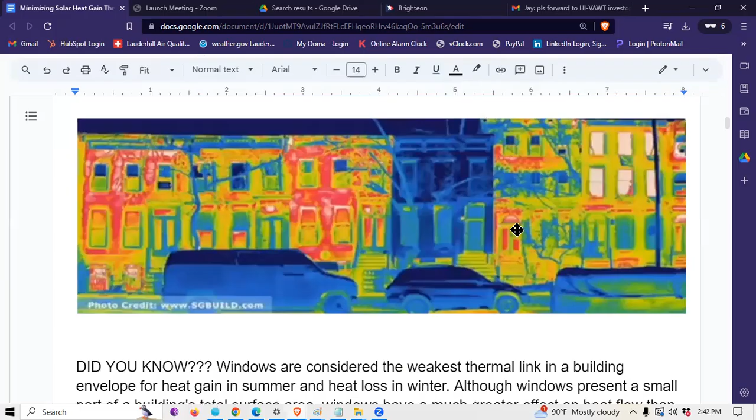As I mentioned, windows are the weakest thermal link in a building envelope, which is what comprises the walls, floor, ceiling, and anything exposed to the exterior. Windows are the weakest thermal link for heat gain in summer and heat loss in winter. Although windows present a small part of a building's surface area, they have a much greater effect on heat flow than walls, ceilings, or floors.

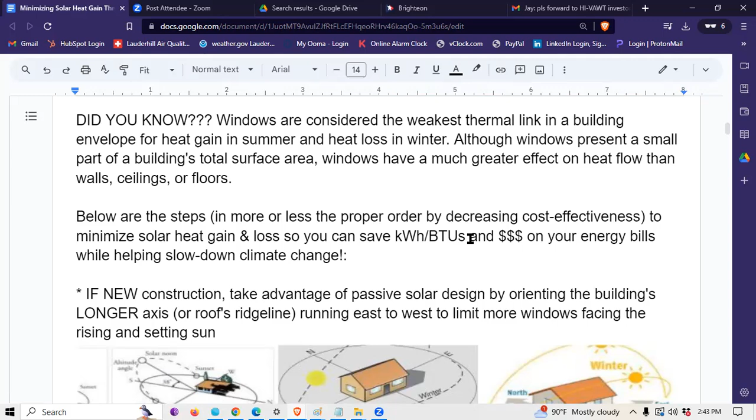Now, the steps below are, in my opinion, in more or less decreasing cost effectiveness. So the earlier ones will have a shorter payback and a higher return on investment, and the later ones will have a lower return on investment, a slower payback. This will help you save kilowatt hours or British thermal units for those using heating fuel, and save money on your energy bills, while also helping us slow down climate change.

Now, this is for new construction only, of course, because you can't just take your building and reorient it. So if you're able to, at the design stages before you've broken ground, you want to take full advantage of passive solar design by orienting the building's longer axis, or the roof's ridge line, running east to west, meaning left to right.

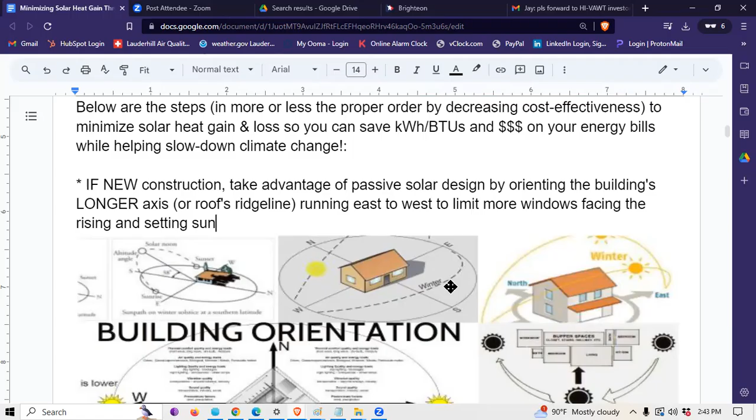Now, this is applicable to both the northern and southern hemispheres. Orienting the building this way will limit the number of windows facing the rising and setting sun, meaning less solar heat gain coming in through the windows at sunrise and sunset. That's why you want to orient the building's longer axis running east and west, so you have fewer windows facing the rising or setting sun.

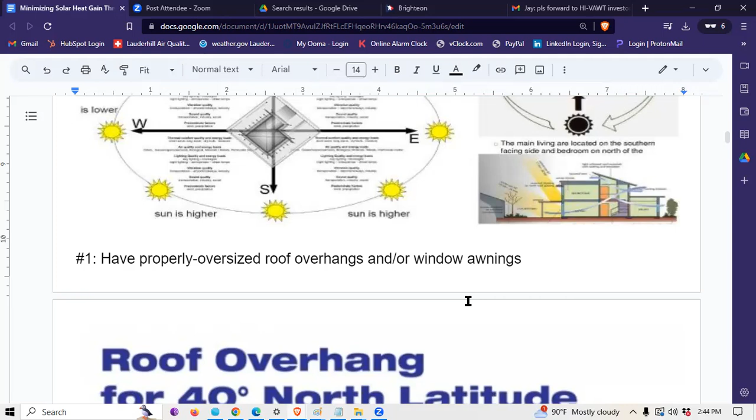Now if it's not new construction, for all existing buildings and retrofits, the very first thing you absolutely must do—it's so low-tech, not sexy—is to have properly oversized roof overhangs over any windows, especially the southern-facing ones if you're in the northern hemisphere.

And definitely block off the east and west facing windows. So as you can see, this is a window facing south. The sun is at a different angle depending on whether it's summer or winter months throughout the year. So you've got higher summer sun, so you can have a shorter overhang. It'll cut it off, not having any sun go in directly through the windows.

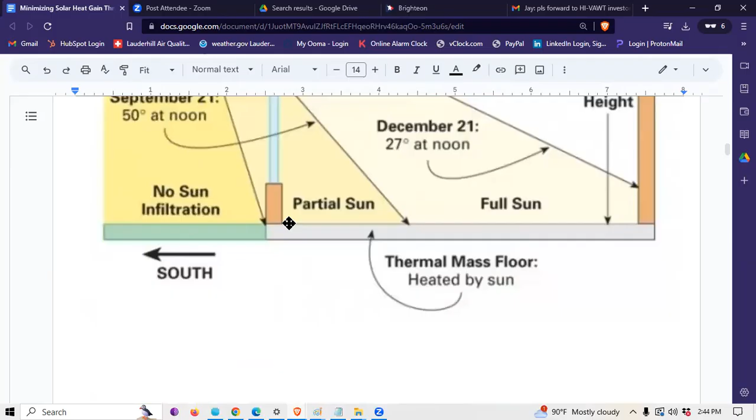So you see how this cheap little solution, an overhang or an awning, could make a huge savings in your energy bills. As much as 77% just by having properly sized, positioned window awnings or roof overhang. So that's amazing, very well worth your time to calculate this.

You can even have adjustable awnings that are retractable or even motorized. And we'll get into some other options as well, such as solar screens.

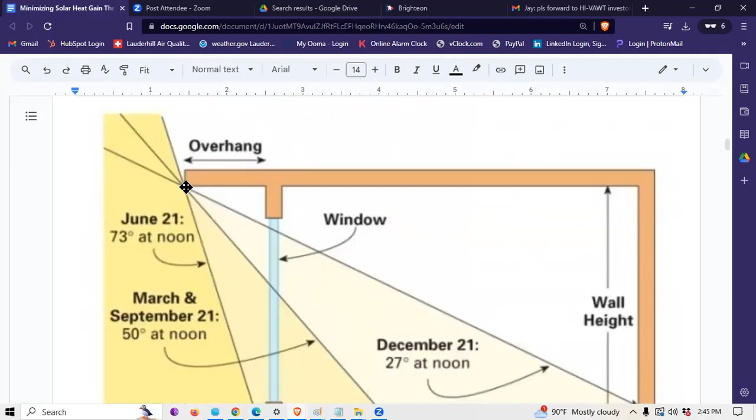The winter sun is lower, so that's why you see this angle here, December 21st, 27 degrees. You actually want it to stick out more because the sun is going to be lower. So depending on the time of year, it'll determine how long your overhang is going to be.

So just look at this image, study it at your own leisure some more if you're not fully getting it. Now again, not sexy, it's more of a passive kind of thing to deal with solar heat gain.

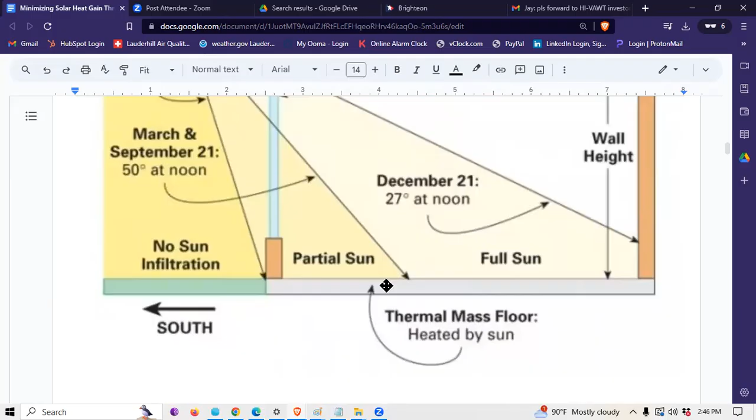Now this is actually facing south, and this is in the northern hemisphere, mind you. So south-facing windows, you definitely want properly oversized roof overhangs or window awnings.

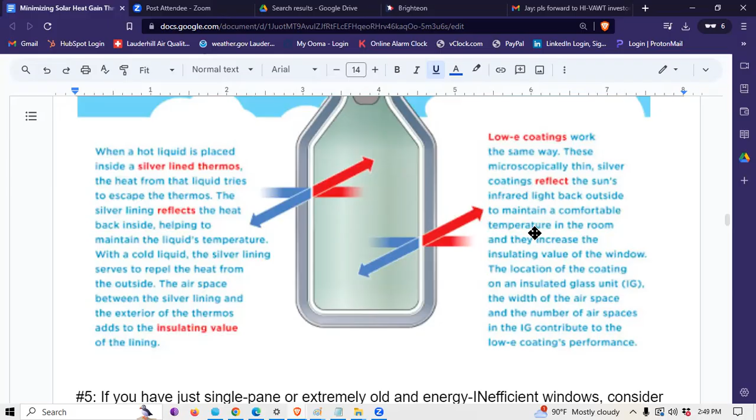I'm sorry, I don't have any provider, but you can Google that, maybe find a window specialist around you in your area.

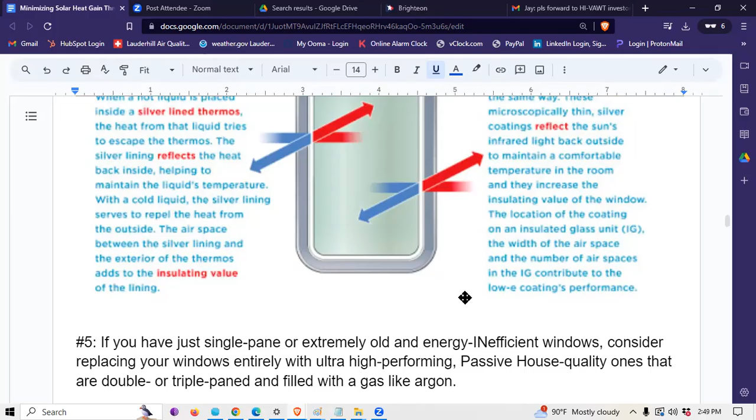The fifth tip: if you have just single pane or really inefficient windows because it's an old house you're in, you can consider totally replacing those, swapping them out with some really high performing passive house quality ones that are double or triple pane, and even filled with argon gas to have even less thermal intrusion from the windows.

Now, this is not going to pass, qualify, or get permitted if you're in a high velocity wind zone, like around hurricane territories like Florida, the Gulf Coast, Atlantic Coast, and Texas, of course. But you can watch a video by going to this link here. I won't play it, but you can check it out at your own leisure to see these high performing windows.

These things can actually cost as much, or possibly more, than solar panels. Just contact one of their sales managers, Craig, there in Colorado, for a complimentary estimate or to get your questions answered. Their website is thinkalpen.com. This is just an infographic showing you how high performing the Alpen windows are.

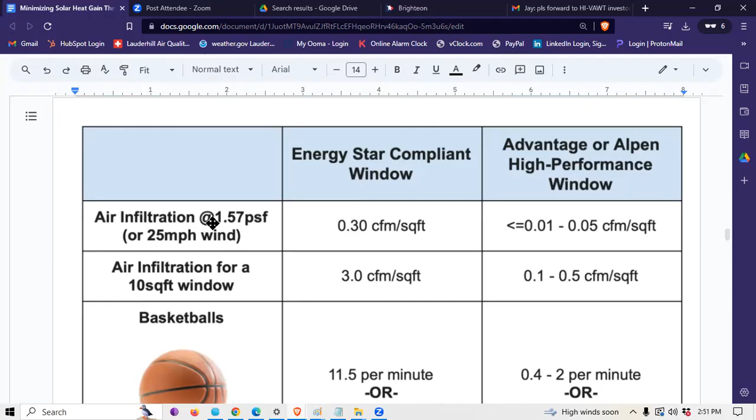This is just your typical Energy Star.gov rated window. The air infiltration will be 0.3 cubic feet per minute per square foot, and if you have an Alpen high performing window, it's almost nothing. That's at 25 mile per hour wind, and this is air infiltration through a 10 square foot window. This is 3, and this is almost nothing again.

So this is an example of how many basketball openings you have, and you're letting in over 690 per hour, whereas with the high performing window you only have 24 to 120. That's the amount of volume of air from the outside infiltrating, because you've got a higher performing window compared to your above average Energy Star rated window. So yeah, that's the improvement — that's huge, 83 to 96% improvement.

Get your money back pretty good — a single digit years, should be less than 9 years, I believe.

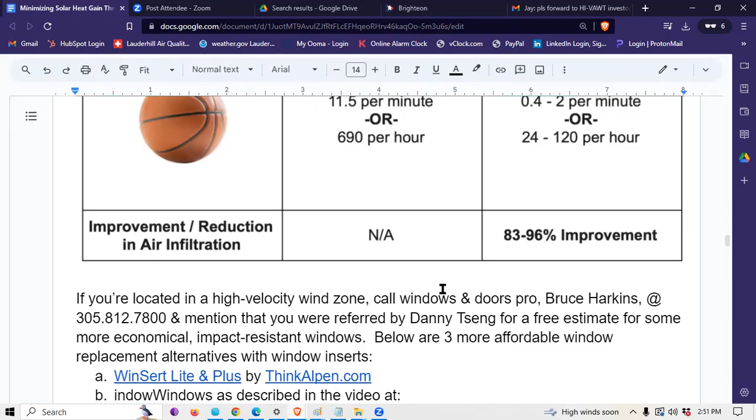Also, if you're in a high velocity wind zone like South Florida, please call our good friend Windows and Doors Pro, Bruce Harkins. This is his number: 305-812-7800, if you'd like to get an estimate for impact windows. Again, that's 305-812-7800. Just tell Bruce Harkins that Danny Tseng referred you.

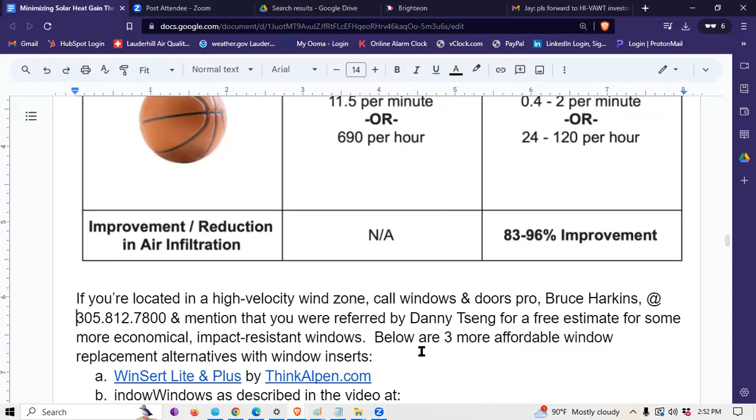Now, if you're not willing nor able to afford a total window replacement, below are some great alternatives that have to deal with window inserts. I don't currently have an active relationship with them, except for Think Alpen, but I don't get any referral commissions on their WinSert Lite and their WinSert Plus.

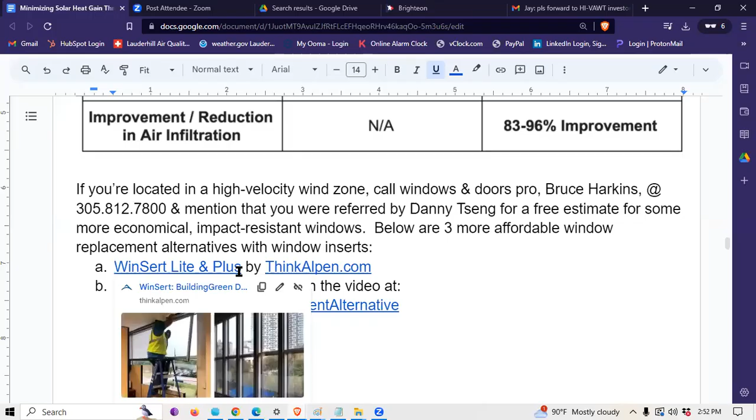But you can contact Craig or his team there at Think Alpen for an estimate. I believe they're only doing volume purchases for apartment building owners and developers, so I don't think he'll take your call if you're just doing it for one single house. I'm sorry, at the moment they're extremely spread thin with big projects and developments, new construction, multifamily, and all that.

But anyways, another one you could reach out to is Mr. Sam Pardue over there in Portland, Oregon, with his cool Indow windows. His website is indowwindows.com, and you can watch a video by going to this link here.